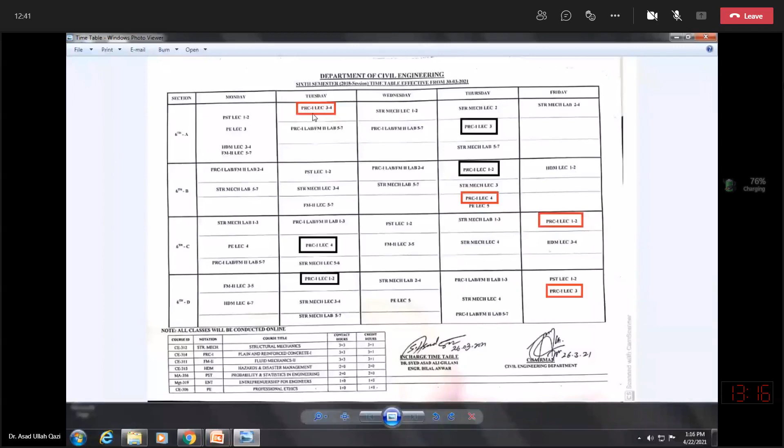Okay. So first thing is, let me just show you that video, which is present in the files folder of section A. In files folder and in recordings, it was on, today is actually April 22nd, Tuesday, 3rd and 4th lecture. So it will be on April.

You are right, this file was recorded on Tuesday, in a little different style. Rather than mentioning the date, the day is mentioned. So it is a 247 MB file. Once it is downloaded, I will upload it in your files folder. So today I will start from the lecture on balanced steel ratio. First I will talk about reinforcement ratio, and then I will discuss this small derivation which is very important, how to determine the balanced steel ratio. Let me start the recording.

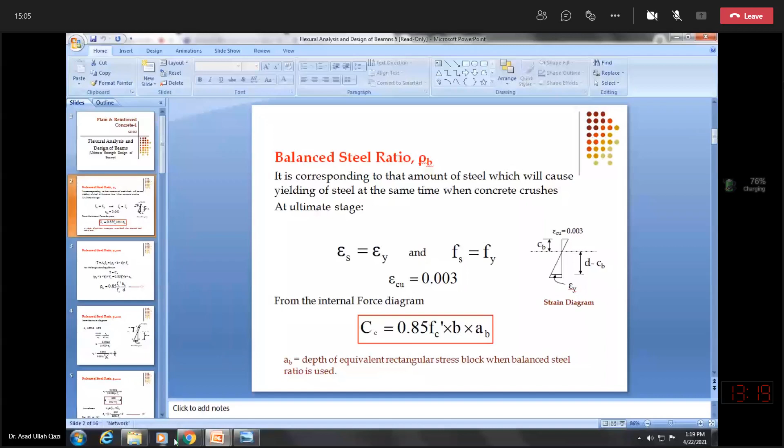So as you mentioned, most of the students have tried to solve that example problem. So now let me start the discussion on first what is reinforcement ratio, and then I want to derive the balanced steel reinforcement ratio. I mentioned in my previous lecture that there are two cases, case 1 and case 2. Case 1 means a tension controlled beam in which steel will yield, and it will yield excessively, and finally concrete will crush. Case 2 is the beam in which tension steel will not yield while concrete will crush. It is also named as compression controlled.

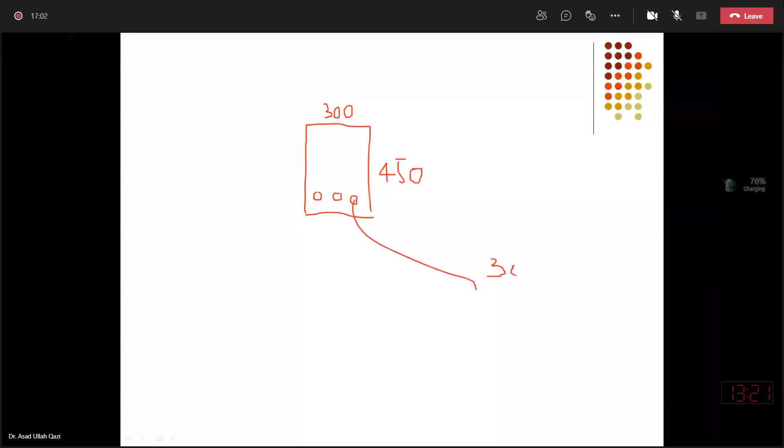So the problem which I assigned you was of a beam of width 300 by depth 450, and in that problem I mentioned that there are 3 bars of size number 25, and the steel grade of these bars is grade 300. Yield strength of these 3 bars is grade 300, and their dia is number 25, and concrete in this beam was of grade 20 megapascal.

So Fc prime, the 28 days compressive strength of the concrete given was 20 megapascal, reinforced with 3 number 25 bars of grade 300. So I assume that the cover from the center of the steel to the bottom of the beam, the lower edge of the beam, is 75 millimeter. It is my selection that I selected a cover to the center of the steel layer of 75 millimeter.

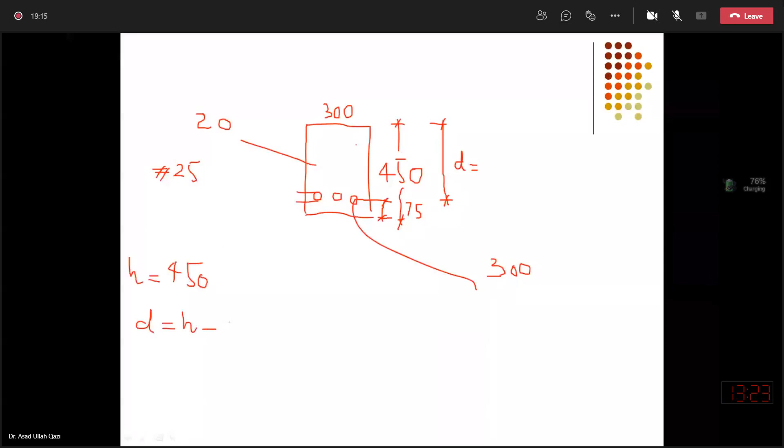So when I select cover 75 millimeter, I will be left with the effective depth of the cross section, which will be the distance from the top compression fiber to the center of the tension steel. We use small letter d to show this dimension, and 450 minus 75, because 450 was the gross depth, total depth h, and if I subtract the cover, it will be d equal to h minus cover. So we will get the answer 375 millimeters.

Now, the idea of how much steel area is present in a cross section is very useful information, because this will give you a very quick understanding of how lightly or how heavily the cross section is reinforced. We term this information as a ratio, Greek letter rho is used, and we define this unitless ratio as reinforcement ratio, in which in the numerator the area of steel in the cross section is placed, and in the denominator the effective area of the reinforced concrete cross section. So it is the ratio between area of steel in the cross section divided by the effective area.

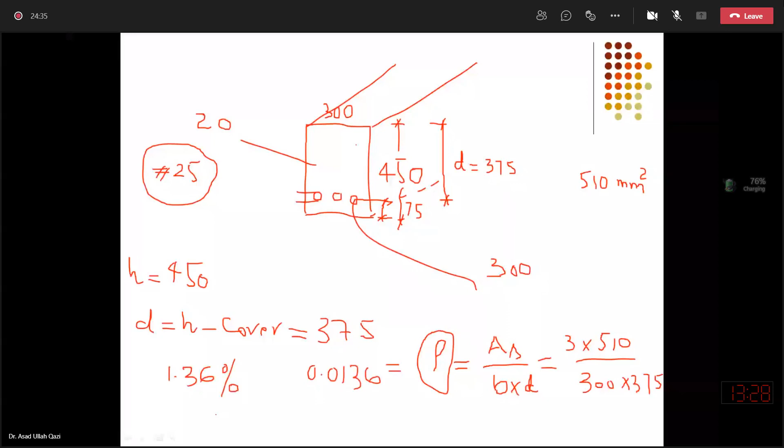The beam which we analyzed for capacity was actually a case 1 beam, in which steel was at yield when concrete crushed, and we got the reinforcement ratio 1.36% in this beam. So this gives us a very good judgment that very close to 1% is the reinforcement ratio in the cross section when I am getting case 1. If you increase this reinforcement ratio to 3% in the cross section, you will start getting over reinforced behavior, or case 2.

If you keep on increasing the area of steel, finally your section will shift from case 1 to case 2. So once you write the equilibrium equation, you will get that steel is not at yield when concrete crushes.

So you have seen in this example problem, please watch the recorded video because there are a few points which I discussed with section A. When you write the equilibrium equation of this beam, you get As into Fy equal to 0.85 Fc prime into a into b, and you assumed that your steel is at yield. Based on this assumption in this equilibrium equation, you got the a value, and probably you will get a equal to 90 millimeter.

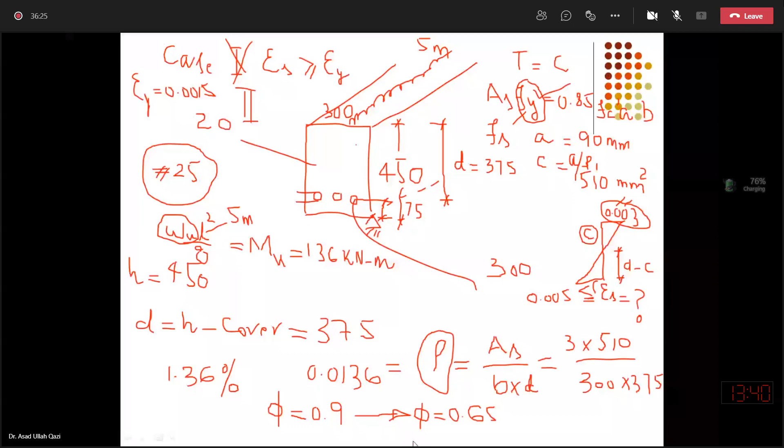So this is what I have briefly revised, which I discussed with section A, but please watch that recorded video because you will get all the steps. Now, just for your information, as I mentioned that once you will consult code, and I have shared with you ACI 318-2019. So in ACI 318-2019, in Appendix B, you will get steel reinforcement information.

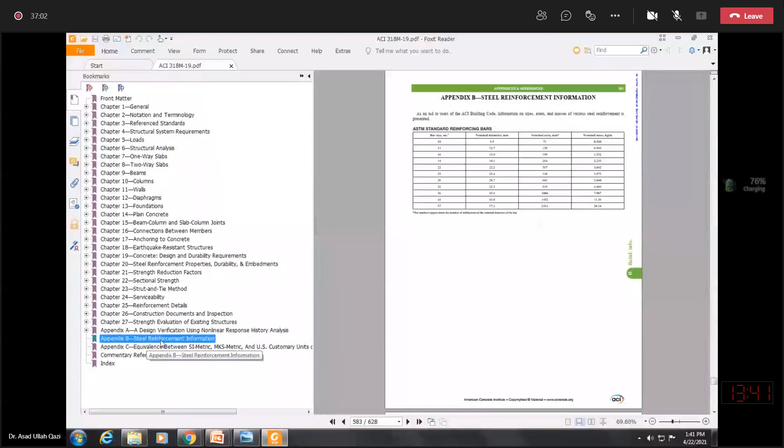And here you will get steel reinforcement information and different bar size numbers, ASTM standard reinforcing bars. So starting from number 10, number 13, number 16, 19, 25, which we have used in our example problem. So nominal dia given for this is 25.4 and the nominal area given is 510 millimeter square and nominal mass in kg per meter is given.

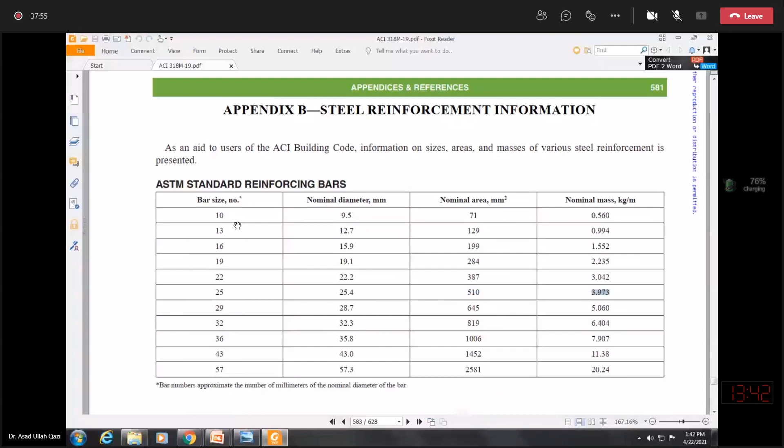In Pakistan, we normally use in our normal structures bars with dia number 10, number 13, then number 19 and 25. So mostly these four bars 10, 13, 19, 25 will be used. So I recommend you to at least memorize these four bars nominal areas because you will be mostly using them in your calculations.

In FPS system, number 10 is given the number 3. Number 13 is given the number 4. Then number 19 is given the number 6. And number 25 is given the number 8. And in our local language, when I say bar size 10 in SI system and number 3 in FPS system, we call it teen sutra. Our laborers are well familiar with the local language, they call it teen sutra ki bar.

Char sutra: number 13 will be number 4 and normally they call it char sutra. In their point of view, 1/8 inch is actually 1 sutra. So this is number 3, number 4, number 6, and then number 8. Number 8 means 8 sutra, 1 inch bar. So I recommend you to at least memorize these bar sizes because otherwise you need to consult such design aids again and again. And furthermore,

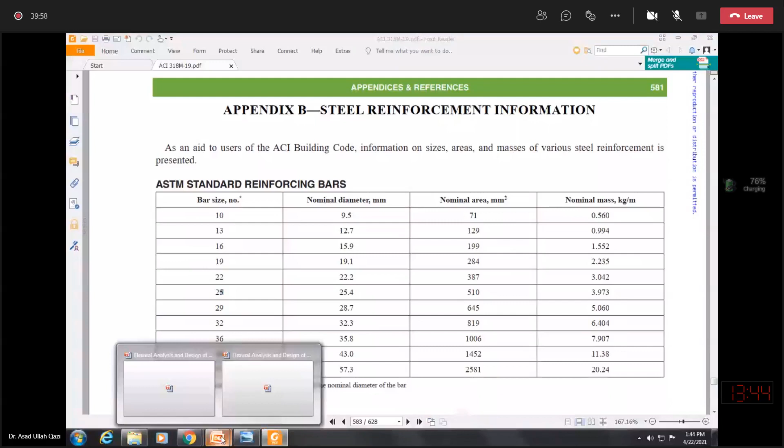as I have given you idea about the reinforcement ratio, in the beam which we solved, the reinforcement ratio is around 1.36%. So if this reinforcement ratio is compared with some typical ratios, you will be able to classify the cross section very quickly. What those typical ratios are: one of them is balanced steel ratio, rho from the Greek letter with subscript B. So rho with subscript B will be the notation used for balanced steel ratio,

and it corresponds to that amount of steel in the cross section, that area of steel, those many bars in the cross section, which will cause yielding of the steel at the same instant when concrete approaches crushing. So it is a very important, unique situation, a reinforcement ratio which will result in crushing in concrete and yielding in steel simultaneously.

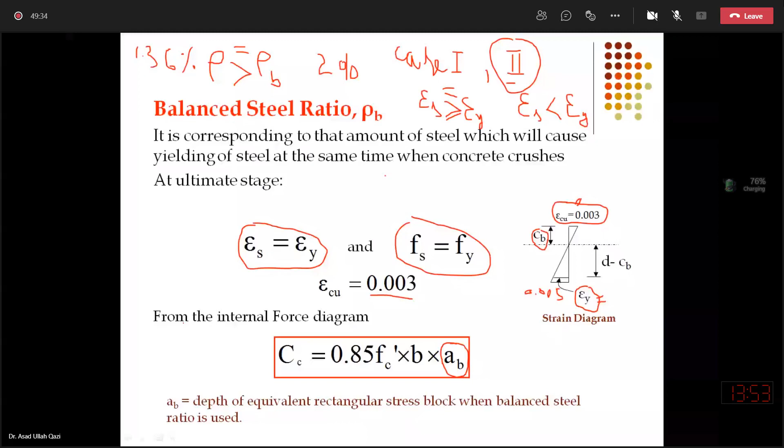And in writing the equilibrium equation at a section, T equal to C, I will put without any doubt T equal to As Fy, because I am just at yield. So Fs is equal to Fy. I am keeping Fy as it is, but I am going to replace the area of steel, because we defined the reinforcement ratio as As over bd. So if I have the area of steel satisfying the balanced failure, I can replace it with rho bd, with a subscript b on rho, since it is a balanced reinforcement ratio. So T will be replaced with rho b, b into d.

And when I write the basic equilibrium equation, I will keep rho B on the left hand side. b and b will cancel and it will be simplified to 0.85 times the ratio of the material strengths and the ratio of ab over d. So still in this equation, I need to know the material strengths in the cross section, the effective depth of the cross section, and the uniform stress block depth at balanced failure.

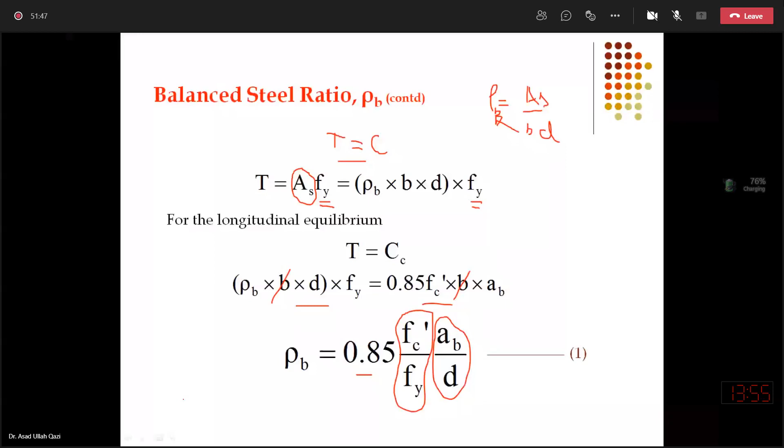So I want to replace this ab with some terms which are easily determined, which are not unknown, so that I can determine rho B without the difficulty of first calculating the neutral axis or uniform stress block depth.

So in order to replace that ab, I will take help of the strain diagram. As we have seen earlier, for balanced steel ratio, the strain diagram should satisfy the condition of crushing and yielding simultaneously, and the triangles are similar. So from the similar triangles I will write epsilon cu over cb equal to epsilon y over d minus cb. So you may say perpendicular over base equal to perpendicular over base.

Rather than base over height, you can say perpendicular over base. So I will keep Cb on one side and I can bring the terms on the right hand side, and in this simplified shape I can even replace epsilon y with Fy over Es because Hooke's law is applicable up to that limit, and I will multiply the numerator and denominator with Es over Es to convert this right hand side into a stress format, because strain into Es will give me the stress.

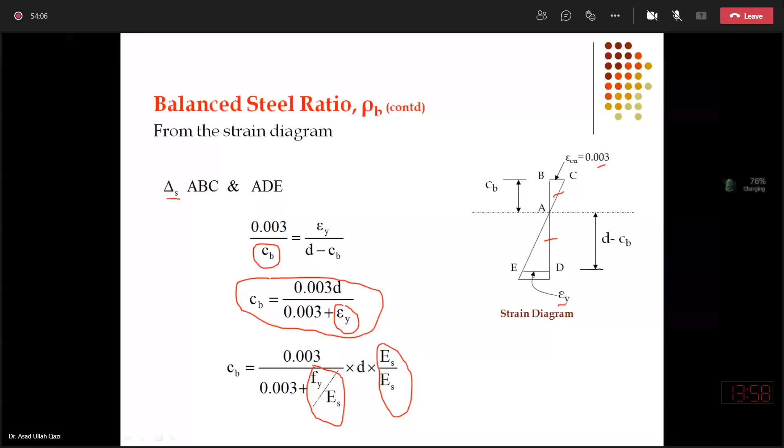So you can keep in mind either this shape or the next one, in which I replaced epsilon y with Fy over Es, multiplied numerator and denominator with Es, and converted Cb into this shape: 600 over 600 plus Fy, into d. So either this you can keep in mind or this one. Both are equally applicable. Both are giving me Cb. If I am having Cb, I can get ab, because ab is beta 1 Cb.

So this ab now I can put in my equation 1 and I will get the shape of rho balanced, which is very important to be kept in mind. Rho b is equal to 0.85 Fc prime over Fy, beta 1, 600 over 600 plus Fy, because ab has d over here, and in our equation 1 there was a d over here, so d and d cancel each other, so we are left with this equation of rho b.

And look at the rho b. Rho b is depending on the material grades, beta 1, which again depends on the neutral axis, which depends on the concrete grade, because we learned that f average will change once we change the concrete grades, and that's it. So rho b can be easily determined without any problem.

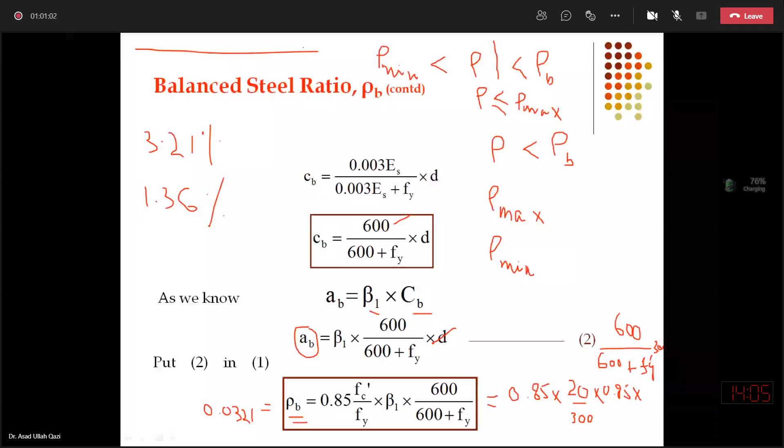Ideally our rho should be less than rho balanced and greater than rho minimum, and furthermore if rho is less than or equal to rho max, it is more preferred, and rho max will come somewhere over here. So on the rho chart, increasing in magnitude, rho balanced will be somewhere over here. Then comes rho max, maximum allowed. Don't confuse max with maximum rho; it is maximum allowed. And rho minimum.